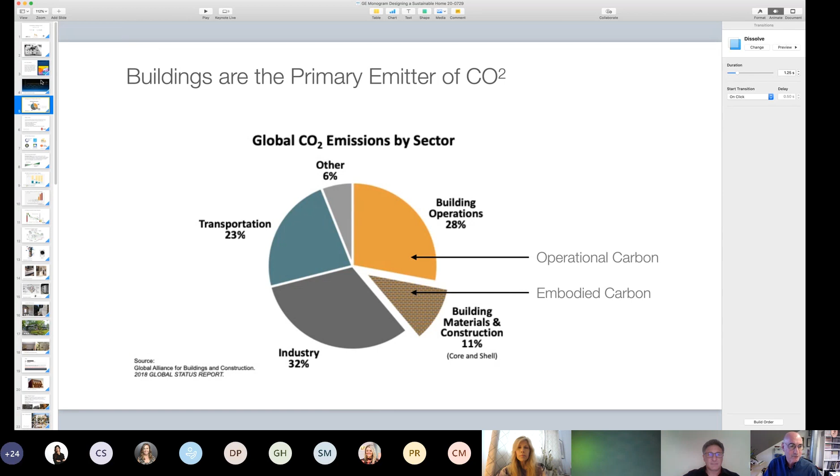And that is—let's just see here. Well, we'll wing it, we'll just do it.

So the next thing I want to talk about is design trends. In 2016, the AIA interviewed 500 architects and asked what they thought was coming in the next decade. It was not granite countertops, hot tubs, or screen porches. It was energy efficiency, which is about sustainability. It was about resilient design, healthy building materials, aging in place, and smart home automation, which actually takes care of all of those.

We look at third-party rating systems, and it's really important to have them because it's all fun to say you have a sustainable green home, but you really need to prove it. There's the WELL standard, which is all about health. Energy Star, which is about sustainability. Passive House, which is really intense about sustainability and health - it's really a performance-based certification. LEED, which does everything - sustainability, resilience, and health - probably the most familiar one. Zero Energy Ready Homes, about sustainability and resilience, which means having a house that's ready to be net zero. And the Living Building Challenge, which is really kind of the King Kong of all of them - that one deals with sustainability, resilience, and health.

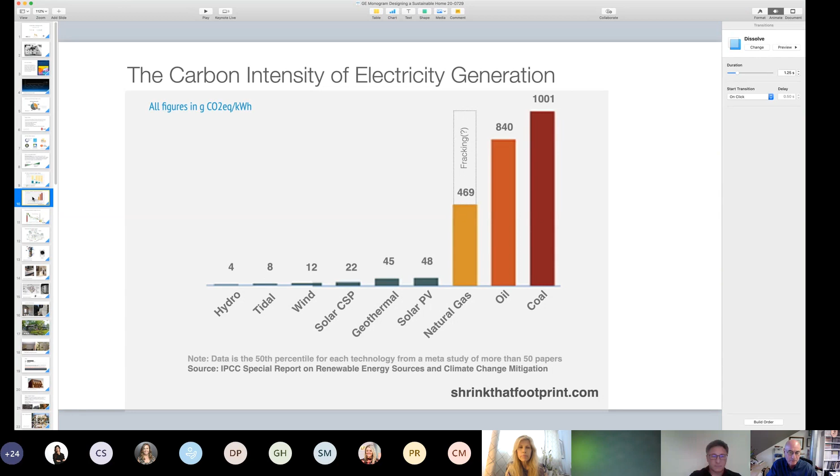So one of the key things is to get away from fossil fuels. Why would we want to do that? If you look at this chart, it shows the carbon footprint for all these different types of energy sources. The ones in dark blue are the renewables. Then we get to things like natural gas, oil, and coal. Coal is being phased out slowly but surely. Oil really isn't used too much for electrical production. Natural gas is, and it's touted as the cleaner fuel, sometimes even the cleanest fuel in ads. Well, if coal's on its way out and oil really isn't used, natural gas is by far the dirtiest fuel. We see these other ones that we really want to transition to, the primary ones being wind and solar. And then we can see techniques of how to do this.

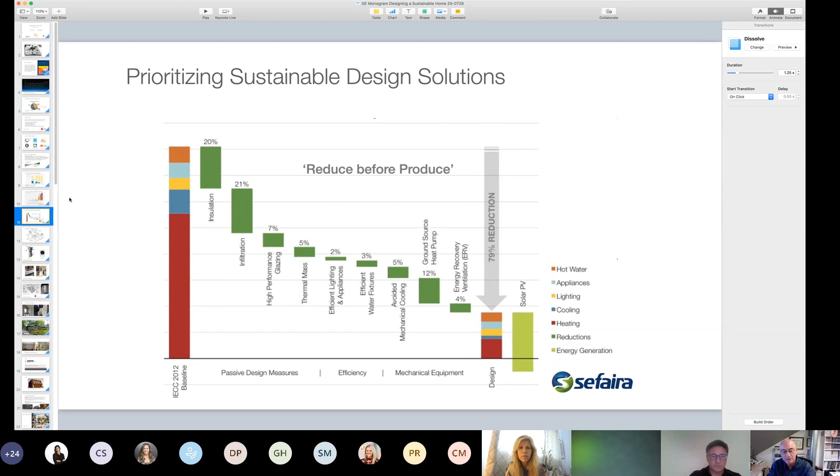So this is how we would do a sustainable project. On the left is the beginning house, and you can see the red is heating and the dark blue is cooling, and there's lighting and hot water and appliances. We want to start with design measures, then insulation and tightening the house with infiltration, high performance glazing, etc. Then we start looking at energy efficient appliances and lighting and efficient water fixtures. Then we move to really efficient mechanical systems. So we get this down to the right-hand side, this little tiny area of energy, and then we can offset it with solar on site. You do not just take the building on the left and put solar panels on it - that is not the way to do this. You want to reduce everything you possibly can and then add renewables to that mix.

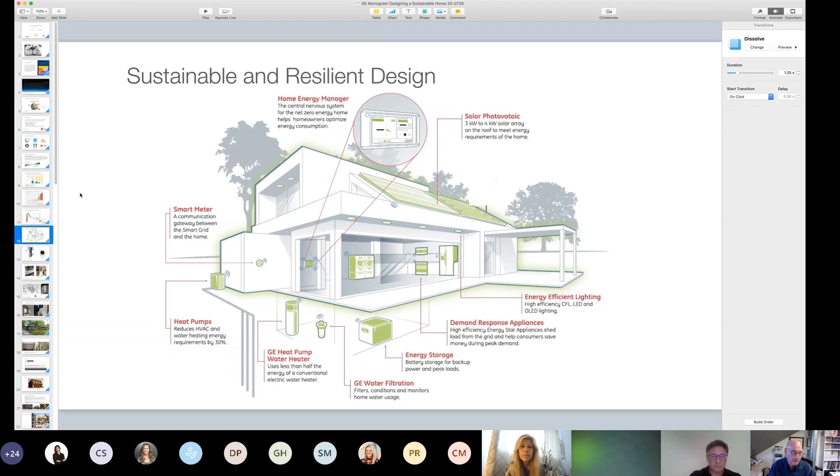This is an image of a sustainable and resilient designed home. It's got things like the Internet of Things, connecting the appliances to the internet - so maybe it's looking for the time of day where it's the least amount of carbon on the grid, or the least cost, or the combination of both. We have very energy efficient lighting, you're seeing solar panels on the roof, there's monitoring that's visible throughout the house and on your phone, smart meters, backup power, etc. Lots of things very different than a house even 10 years ago, but certainly from a lot longer ago than that. So how do we do this?

The appliances need to be all electric. There are 4 general appliances that typically aren't electric. The water heater and the dryer are 2 of them. Here we're being shown a heat pump hybrid water heater, and same thing with the dryer.

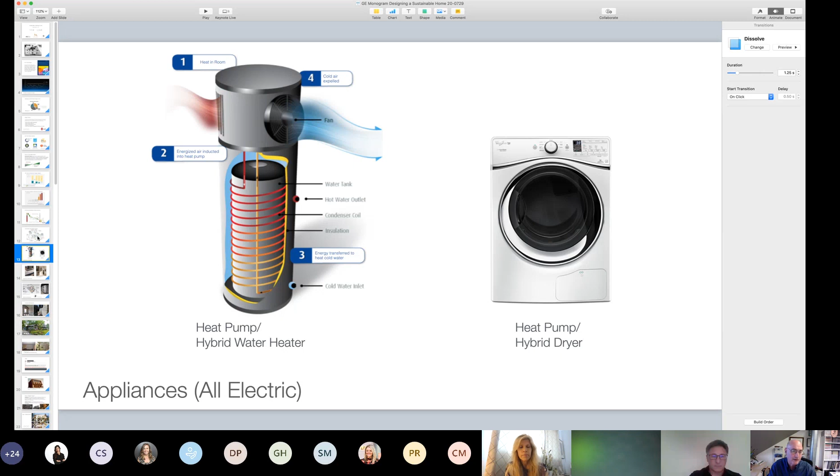What the water heater does is it takes heat out of the house and puts it into the water heater, and exhausts cold air. That cold air can either go directly outside, or you could use it, like if you have a wine cellar, to cool that space. Or what we sometimes do is put the mechanical room next to the whole-house smart home equipment, which generates tons of heat, so we cool that down and use the heat for the hot water.

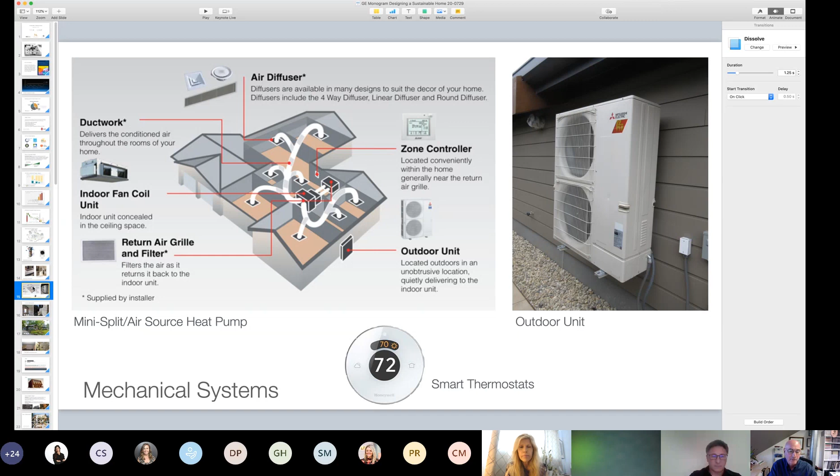And then there's smart thermostats, of course, that control this.

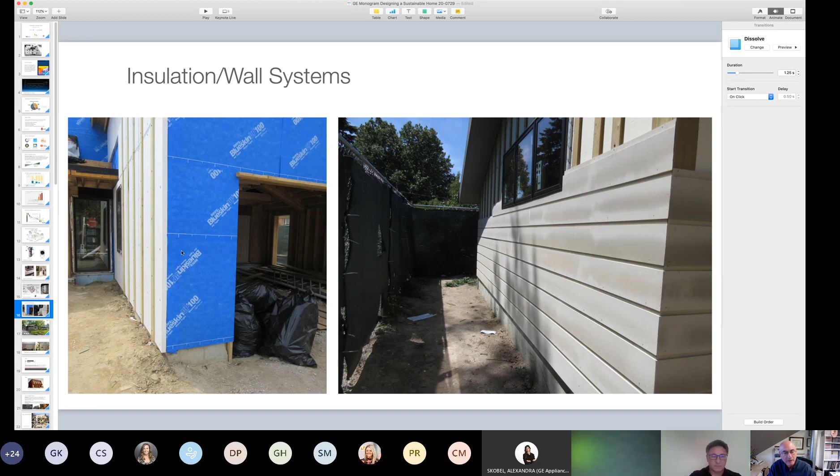Another thing that really helps with sustainability is the insulation and wall systems. What we like to do is put the insulation on the exterior—you can see it here, it's two inches of rigid insulation on the outside. We use a low global warming potential insulation, and then put furring strips on it, which set up the siding that goes on there. This siding is made from fly ash, which is waste from coal. I find that rather ironic, but it's a really great, very stable siding, nice to work with.

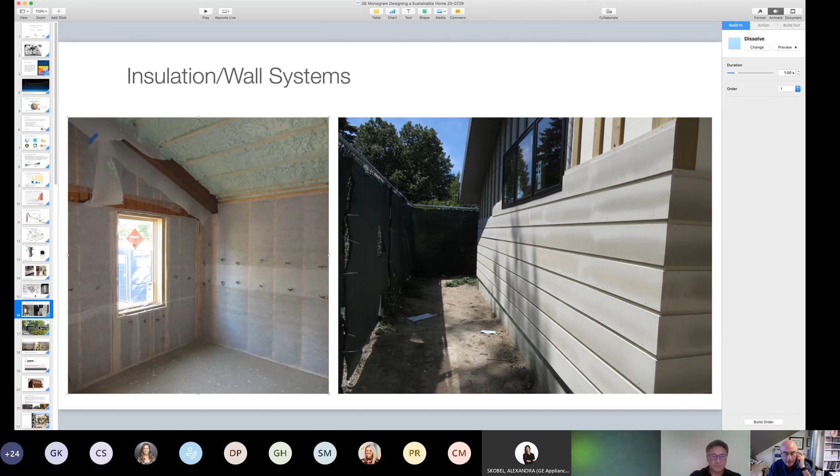Now I'm going to show you an example of what we call embodied carbon. The reason we'd want to renovate instead of build new is there's a lot of energy and carbon that went into building a house.

This is a note I got a while ago. We had done a house for this guy's brother, and his office too, both very sustainably. The letter said, 'Nate, please understand we are not interested in any green elements for the project. We want to have a really beautiful addition.' As if this was mutually exclusive. I find this unbelievable that people think this way. We, of course, snuck all sorts of stuff into his house—you can't unlearn what you know, and what you know is the right thing. So he did get some of it, but it's not one of our stellar projects.

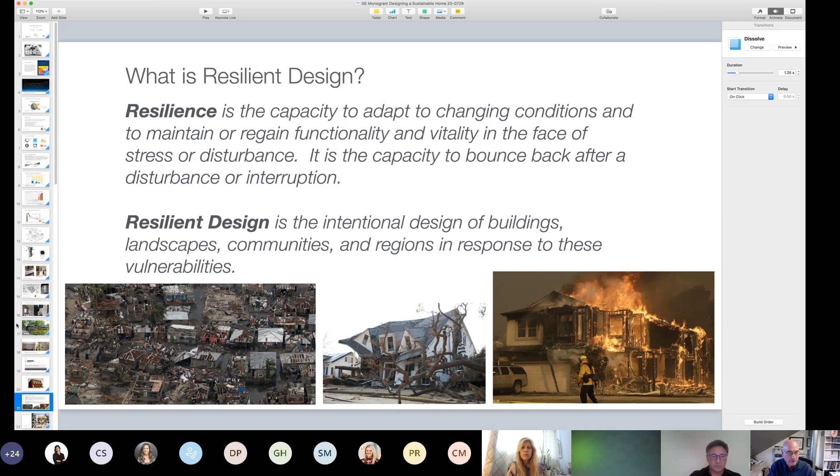I am going to show this first. So this is one of the things with resilient design: integrating solar and battery backup.

After the pandemic hit, everyone was freaking out going to the grocery store, stocking the refrigerator full. Now the scariest thing in the world would be to have the power go out, so we want to make sure that doesn't happen.

Some other things you see are how to detail for resilient design for climate change. In basements, this is from FEMA on the right: you design so it takes water on and you get a little higher than the maximum level you think the water's coming in. You make it so you could take it all apart, clean it up, and reuse it, and make sure your outlets are well above that level. A lot of different techniques and thoughts go into that.

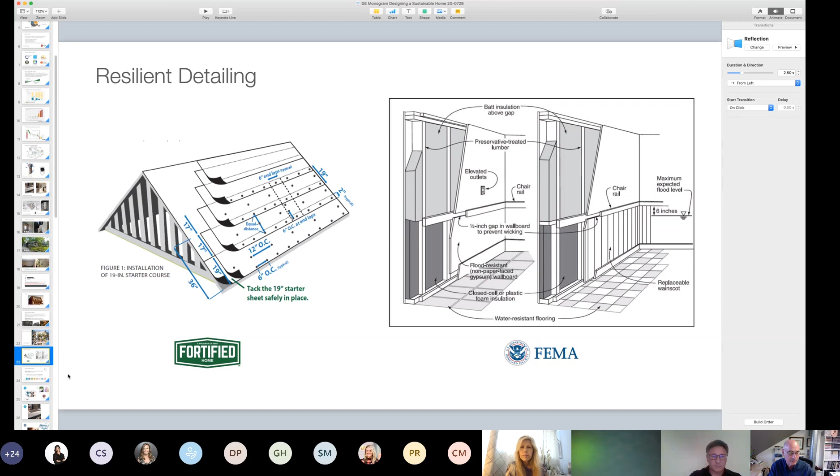Before I get into talking about healthy design, I was wondering if there are any questions that have come in yet. Thank you, Nate. Yes, we have a couple of questions.

First, are there any other places in the world that do really well with sustainable building that you draw inspiration from? Well, that's a great question.

I love looking at the past, prior to World War II, when building design had to deal with all of this because there wasn't abundant low-cost energy. So I look at different climates throughout the world. We were trained in school to look at how things were done in Asia, in Europe, up north, down south, in Africa.

I think currently you can look at Europe. I think Europe is doing an amazing job of really educating people about their carbon footprint. They're all about that. They understand what kind of budget they have for carbon every day, for food, for transportation, for clothing. It's really amazing to see how that society has done that. I think the EU is probably really good on that, and that's probably the best example I can think of.

In particular, certain areas in Scandinavia are doing an amazing job, getting to net zero in a lot of things. When they set a goal, they're very strict about it. Here, you see people, or companies, say something, and I'm curious to see how they're going to do it. But in Europe, they're more committed to it.

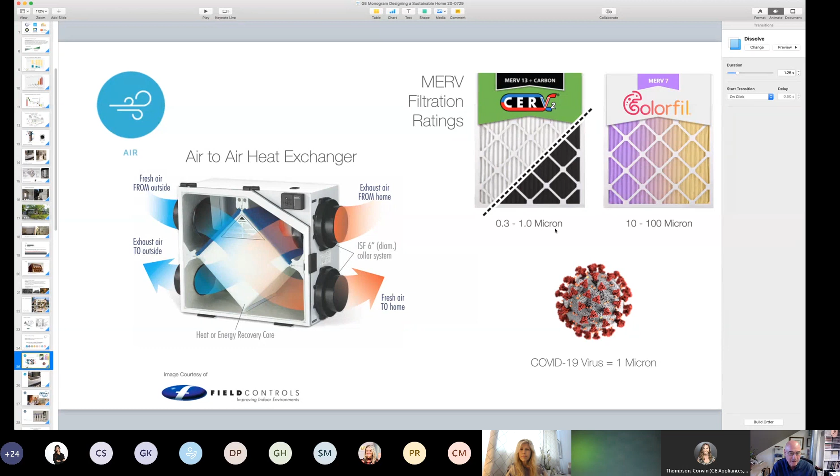And the filters, there's 2 of them shown here: one is a MERV 7 and then a MERV 13. The higher the number, the better the filtration. However, I would caution that the higher the number, the lower the airflow, so more energy is used to push air through these filters. You really want to think about what level you need. That pesky COVID-19 is 1 micron, so that's going to be into the MERV 13 zone, not the 7, not the 10. So if that's a concern, it just depends on what you're looking for.

That is definitely a key thing, you have to bring in fresh air when you do these really sustainable projects. The other thing I would bring up again is induction cooking. The reason I'm really big on this is not only because of the energy use and how it's not gas being used, but it's also the emissions when you burn something. When you burn with a gas cooktop, you're putting CO2 into your home that's really tight. It's not a good idea to ever do that. So that's why we really want to see a shift to induction cooktops. And again, the top chefs are using this. This is not a downgrade in cooking. This is actually better for cooking.

That's my opinion, but I think that's bearing out all over the place.

The next one I want to talk about is water. We're so used to having bottled water and everything, but you could have tap water as long as it's filtered. That's the key thing, is to filter it.

One of the things with the WELL standard is that they look at the water coming into your house. They don't have a generic filter, they have one geared for your water specifically. So I think that's really great.

You see stuff like whole house or point source filtration. Some people want all the water in their house filtered. You don't necessarily need it for the toilet, or for outdoor landscape watering. But some people think showering is really better with that, and some people want the washing machine to have that. There's certainly thoughts about having it like that.

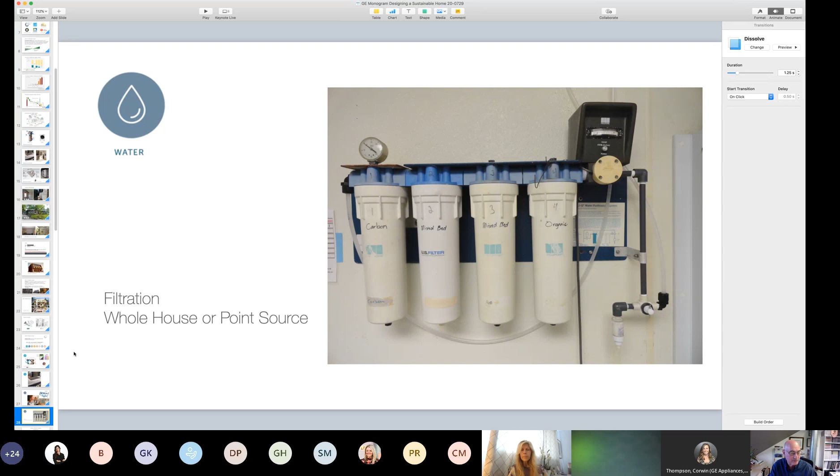In the morning it's more orangish red, and as it moves through the day it turns bluish in the middle, and then it goes back to red. We kind of want to have that same thing. It makes us sleep better, it makes us feel better. So we can replicate that.

The other thing related to that is countertops. It used to be kind of fun to have a tile countertop, but you couldn't have a worse countertop than a tile one, with all sorts of joints and grout and everything to catch stuff. So now we're seeing one piece, even with the sink.

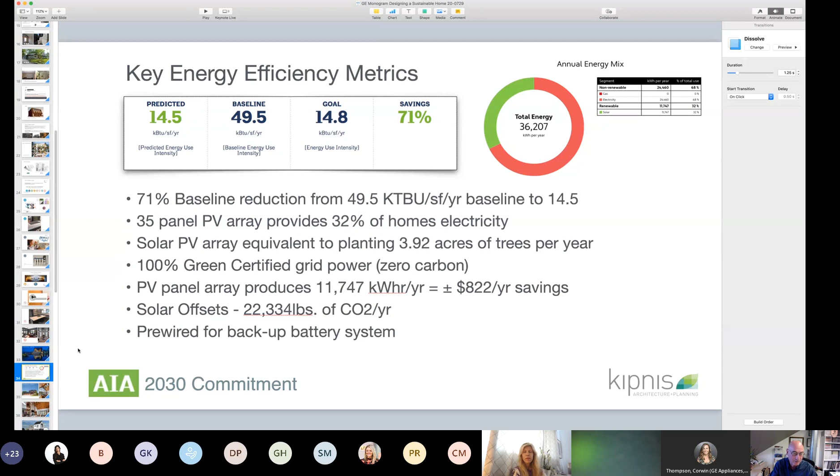We only get about $822 a year of savings, but that's because electricity in Illinois is very inexpensive. That's not indicative of the effort that went into this. But we are offsetting 22,000 pounds of CO2, and the house is pre-wired for a battery backup system.

We always like to have operable skylights so that we can vent the house and get great natural ventilation. And obviously we have phenomenal natural daylighting. You want to take advantage of this as best you can.

There's ways to specify the glass so you don't get so much heat coming in. There's ways to orient the glass. There's a lot of tricks.

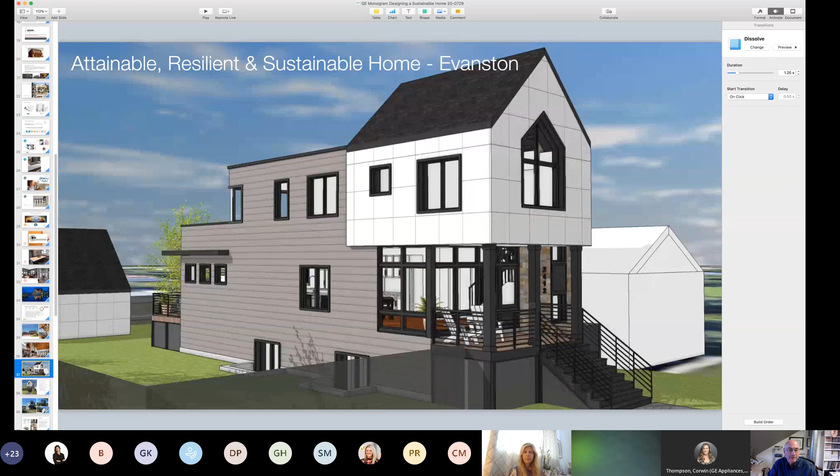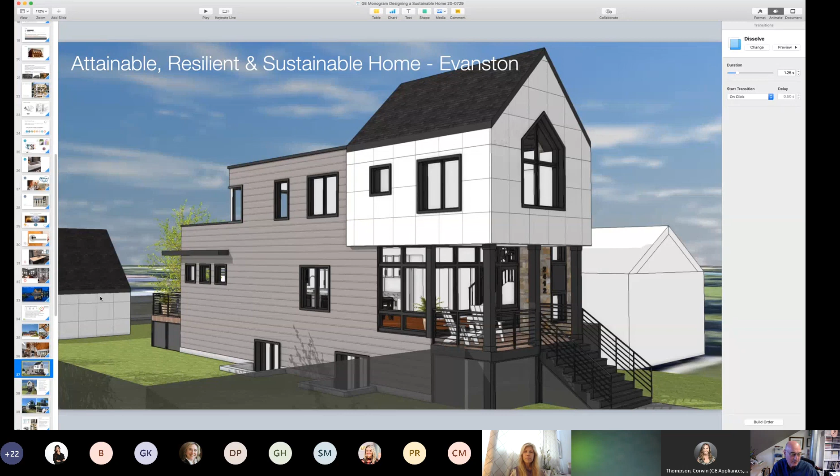The next house I want to talk about is what we call the attainable, resilient, and sustainable home. This is in Evanston — the one I was just at today. The basic idea is there's a meditation room on the second floor, called out with this panel system. The garage is the same exact shape but rotated 90 degrees, so it's kind of kicked out on the site, with solar panels on the back side of that particular garage.

It's under 2,000 square feet on the first two floors and a little under 1,000 in the basement, 3-bedroom, 3.5 bath. It's going to get an Energy Star certification, the DOE Zero Net Ready certification, and the EPA Indoor Air Plus certification. So a lot of healthy stuff going on in this house.

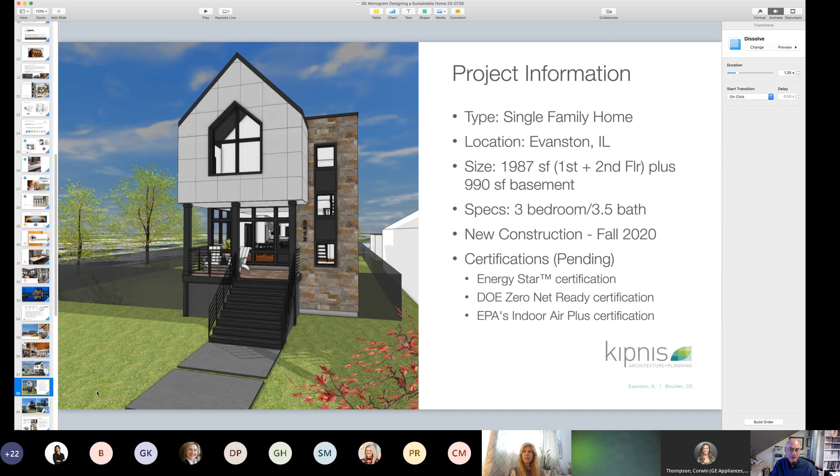It's a Generac battery system, set up so they can add multiple ones in there. The garage is also pre-wired for electric car charging.

We used this system on the interior called AeroBarrier. What it does is spray an aerosol mist — you have to mask everything off in the house during construction. It finds little teeny holes and plugs up everything, making the house really tight.

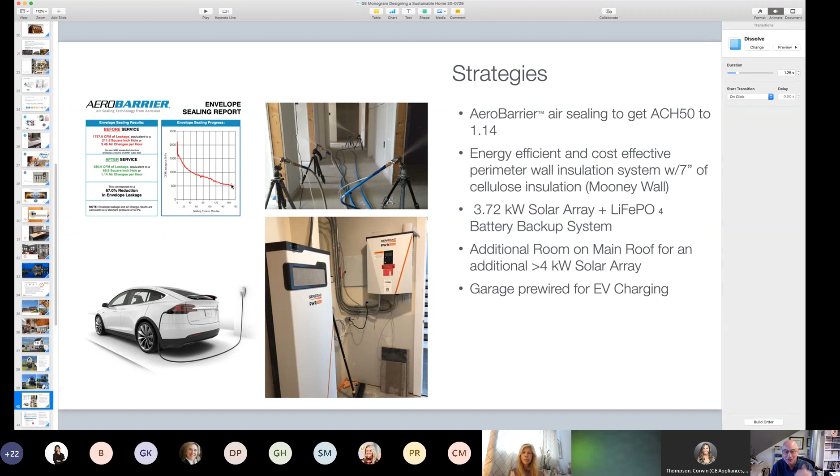This is homing in on passive house level tightness. You can see the report here, like over the minutes — 0, 20, 40, 60, 80 minutes — the tightness of the house is rapidly improving. Then you just say, okay, I'm done. They charge per minute, so you can just say that's good, right about there. We were really impressed with that.

But the one thing about this house is they decided not to go all electric. And it was really frustrating because it was only $7,000 more to do it.

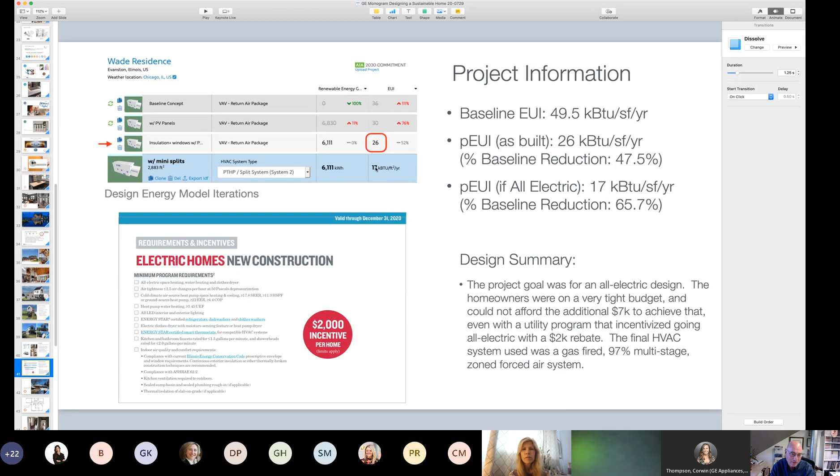But here you can see the energy modeling, and this is what we ended up with. We were at 26,000 BTUs per square foot per year. If they had gone all electric, it would have been down to 17. So it was really frustrating, we were so close to getting that just right.

We opened it all up, put this really cool curve in there so you could see it all the way through, with a skylight in the middle. We completely changed the master bedroom, so you get this great bathroom and bedroom with an office. The master bath is set up for handicap accessibility, although you can't really tell, plus a very generous walk-in closet. The kitchen is all set up for sustainability and handicap accessibility, and there's a really amazing mudroom.

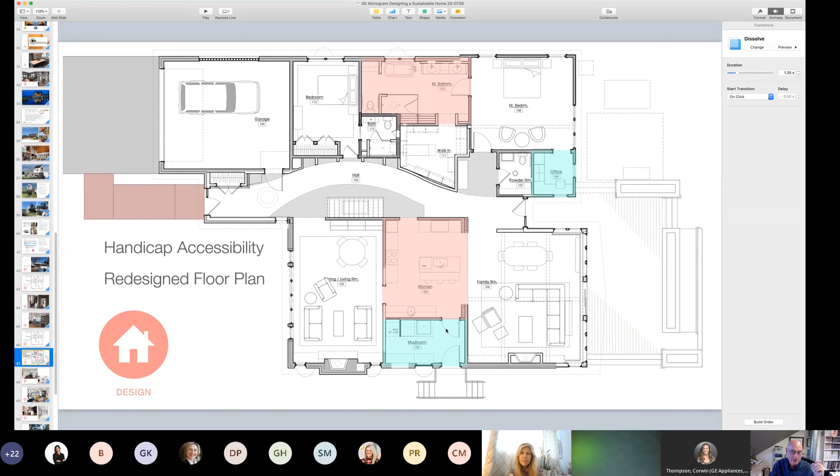We did an addition, and there's a zero threshold to get out to the deck, and then there's a ramp to go down from there. Again, with a ceiling fan, and this has got a lot of smart home integration into it as well.

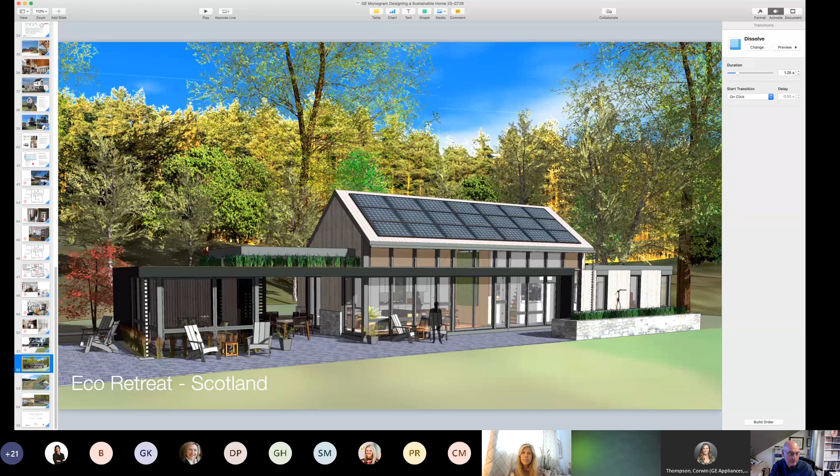This is outdoor space, there's a breezeway with a manual roll-down bug screen here, but there's also plantings up on the roof that you can see while you're in this space, and then a sleeping porch out here overlooking the whole complex. It's off of a loch in Scotland — I don't think the Loch Ness Monster is in that one.

It makes the fire look so real, it's just crazy. Maybe we can share a link for that. There's some videos online that you just absolutely cannot believe. But that's kind of the epitome of everything, that kind of setup in a house like this.

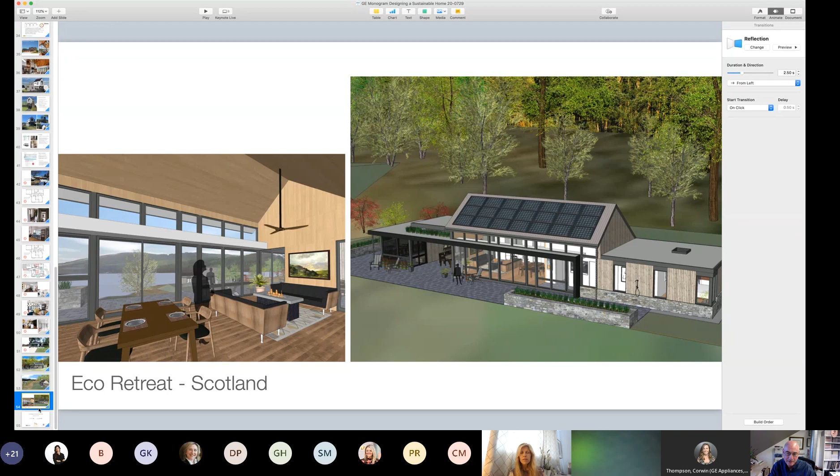Nice small footprint, using local materials, healthy interiors, and a beautiful space. I think it's going to be very desirable for people to want to travel there. So that concludes our presentation, and I'm happy to answer questions.

Wow, well we're definitely all blown away by this work in the chat. Really, really amazing. Let's see, I've got to go back to get some questions here.

First question: are there any good web resources that give you the best green building practices for your specific climate zone? Well, I'm not paid by them, but we use the Green Building Advisor, and I would really recommend them. They're a paywall, so you have to pay to get into most articles, but that to me is absolutely great. There's a lot of good blogs around. You can get information from Energy Star. The Well Standard has got a lot of articles online, as does Passive House, as does the Living Building Institute.

Those sites are really rich with information, and you're not going to go wrong with any of them. The good thing about, in particular, the Green Building Advisor is you can post a question, and I'm sure this is true on the Living Building site as well as Passive House too. Passive House is an amazing community. I think a lot of these have got people so into it, and they're happy to share. There's also a lot of good YouTube channels. Can't think of any offhand that I'd recommend, but you can search around and there's definitely going to be some good ones there. So I would dive head first into a lot of that info.